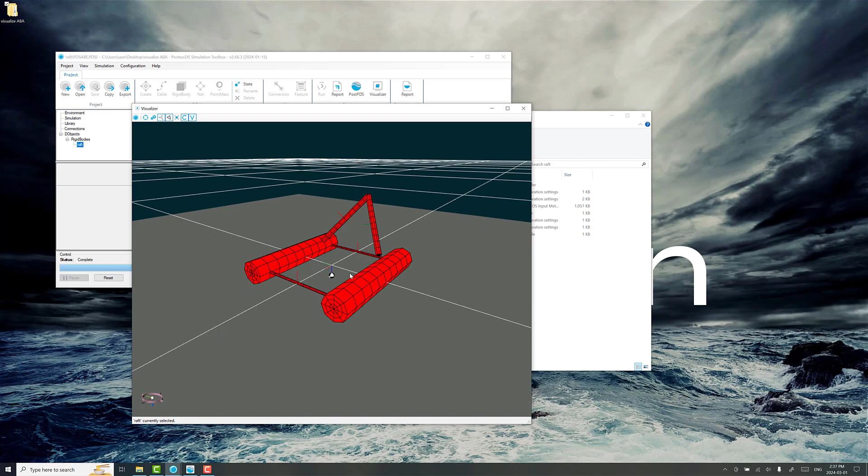We're going to use an older problem setup of this rigid body raft, explained a bit in another tutorial on how you can make a multi-mesh rigid body. It has a series of cylinders representing a pontoon raft with a couple of struts and a couple of cylinders for an A-frame.

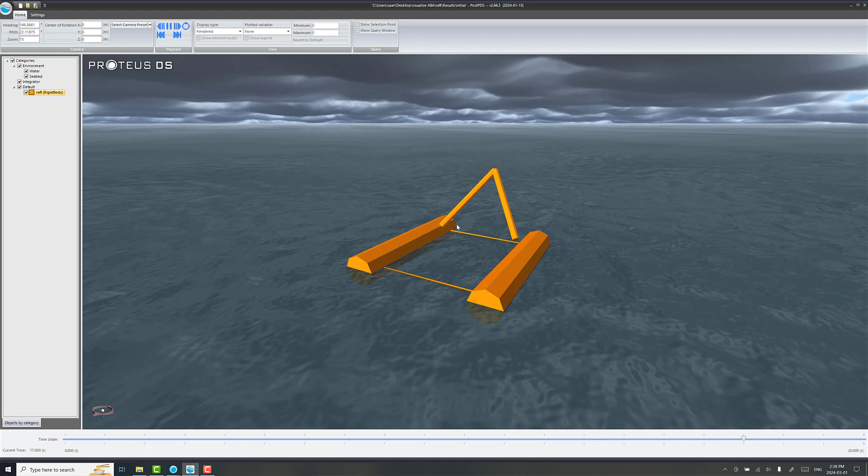If we look at what it's doing in the water, in this scenario it's just floating in a sinusoidal Airy wave. This project version is one rigid body system, and what we're going to do is demonstrate what it looks like when we break it up into two rigid bodies and have a revolute or rotational pin joint between the A-frame and the rigid body float.

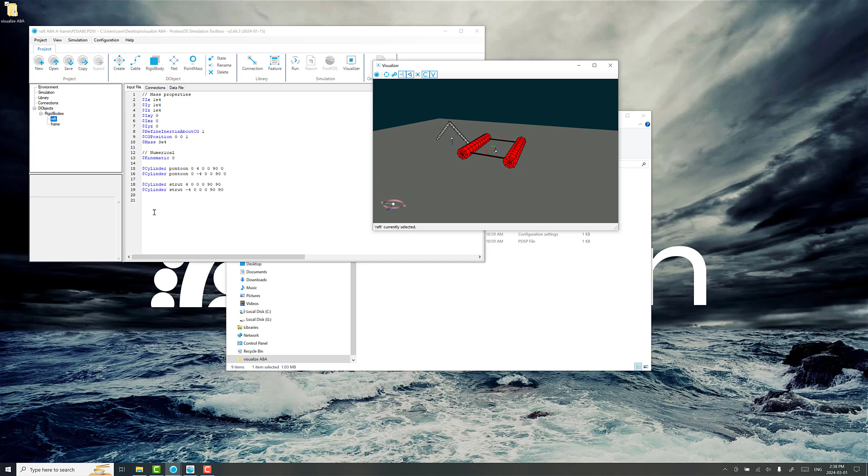So in a separate project here I've broken up the raft into two rigid bodies. All I've done is removed those cylinder features from the raft rigid body, and made a totally new rigid body that represents the A-frame. I want to highlight that these are distinctly different rigid bodies, with no connections between them in this particular setup.

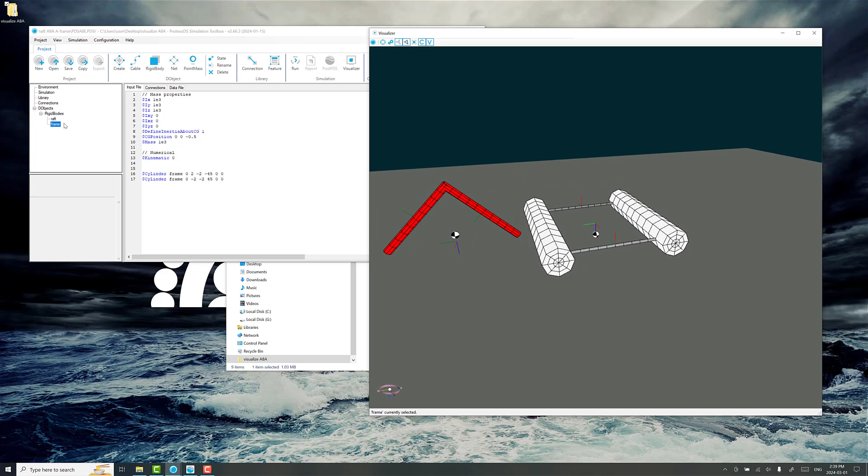You'll see this little soccer ball thing - that's the center of mass. The rigid body frame is here, along where we want the axis of rotation, and the rigid body frame is in the middle between the two pontoons over here. So they're totally separate, independent rigid bodies.

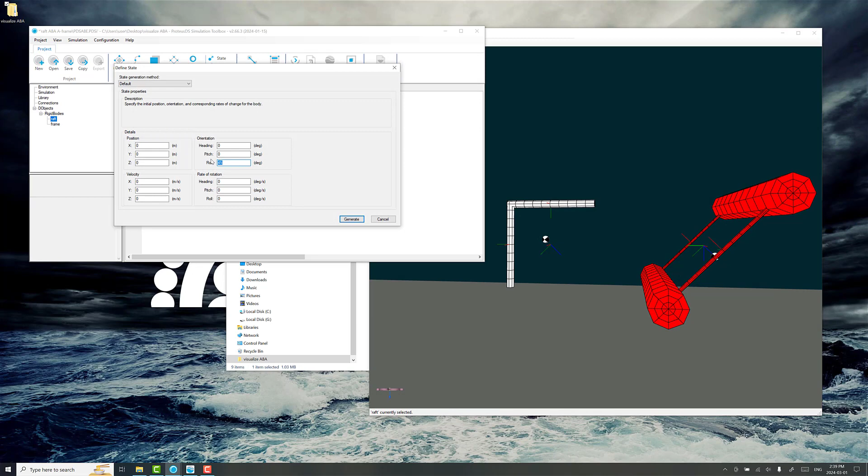If I take, for example, the raft and give it an initial roll - sorry, that's the frame, raft, there we go - if I give this an initial roll, you'll see that in the initial state they're not connected to each other, they're not constrained to each other. They don't have anything to do with each other yet. I have not made an ABA connection between the two of them.

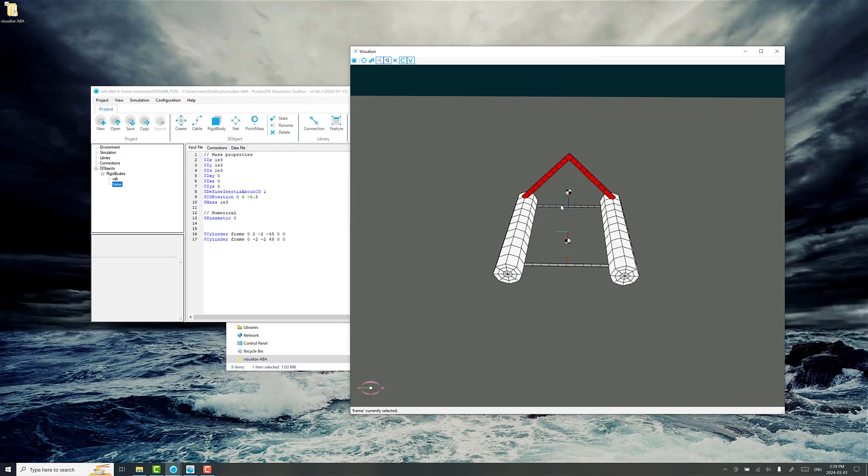So now in this last version of the project, I've made the ABA connection between the two of them. If you've gone through the other training and video tutorials, you'll know more about the theory behind how this works. But essentially, when you make an ABA connection between rigid bodies, the follower rigid body in the relationship - so if we look at the connection here, we see that the follower is the frame and the master is the raft.

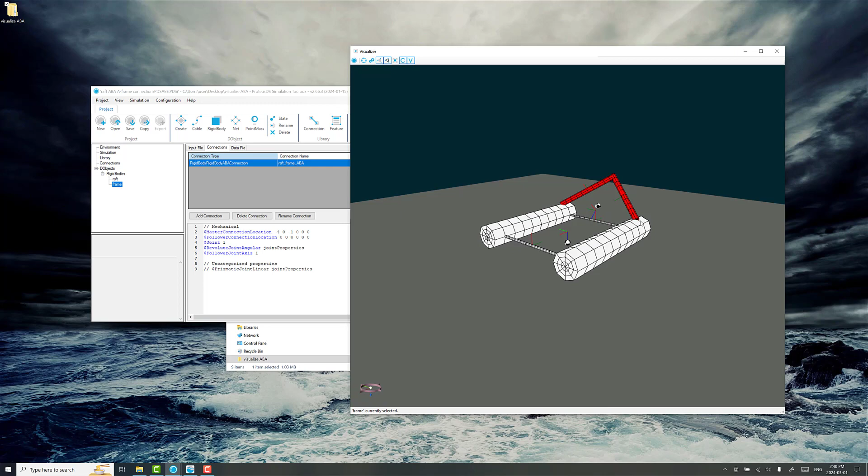So the follower rigid body state is no longer this 6 degree of freedom linear and rotational state along with the velocities - it's the joint state. The way I've configured this is that the joint axis, the pin joint axis, is along this joint frame direction here. So in the connection you specify where the joint frame is relative to the master rigid body frame and where it is relative to the follower rigid body frame, and then the joint state - in this case a revolute joint along this axis with 1 degree of freedom, the rotation, that is the joint angle - shows how the follower rigid body is constrained.

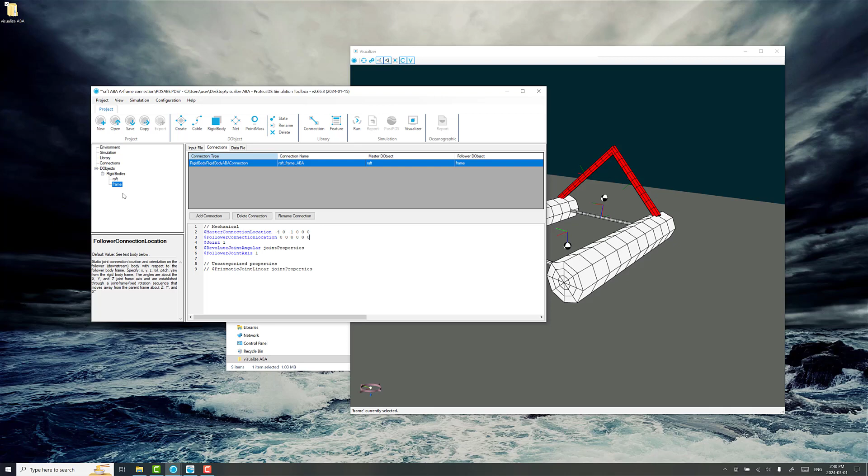So we go to frame and then state, and we change this to another angle, minus 30. It's going to be aiming forward a little bit. You can see very clearly how the joint is set up and how it's working. This is a way to get visual feedback on what's happening.

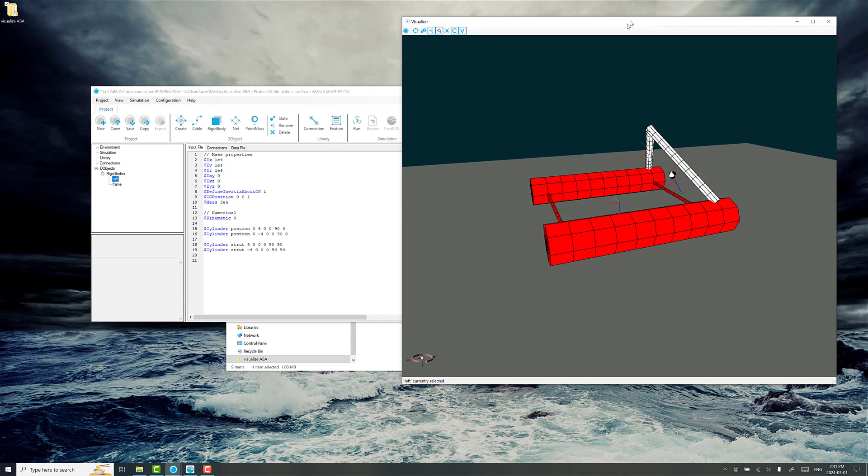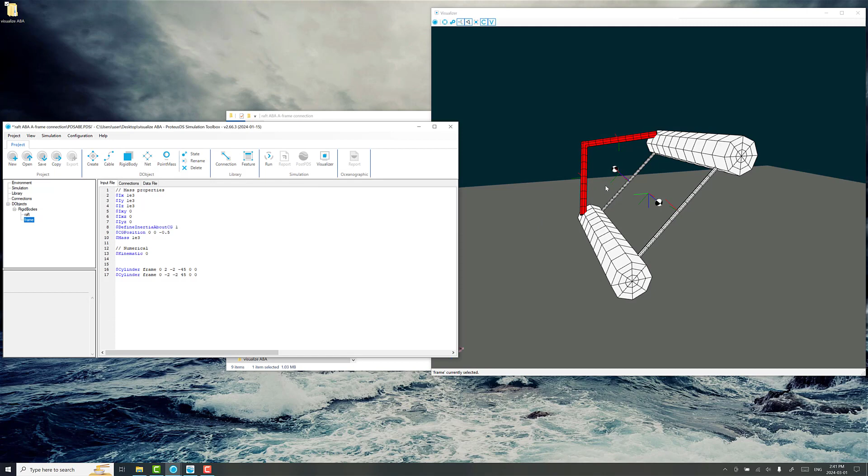The other thing to point out is, now if we change the raft state, you'll see how it's a connected rigid body system. Give it an initial roll - I'm just moving the rigid body system to show what it looks like - so you can see how they're still connected to each other. And again, that joint offset is really like that relative rotation along that local joint axis.

So working with the reference frames requires some careful thought and planning, but what's really important is to take advantage of the visualizer here to get that visual feedback on how the joint's working exactly. All right, that's all I wanted to show for now, so thanks for watching.